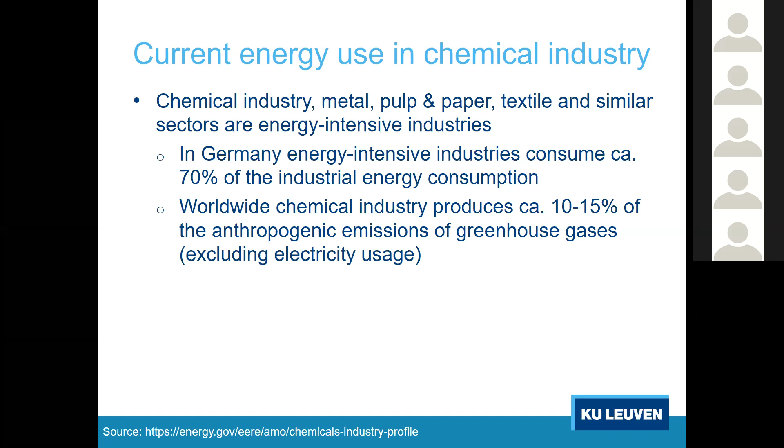Worldwide, if you exclude electricity usage, chemical industry produces 10 to 15% of the emissions of greenhouse gases produced by mankind. And obviously, there is already quite some electricity usage in chemical industry, so that number even increases if you would count that along. And again, we've seen numbers on how the energy market changes and the energy uses change, but still predominantly fossil fuels are the energy source for energy and electricity in particular to be produced.

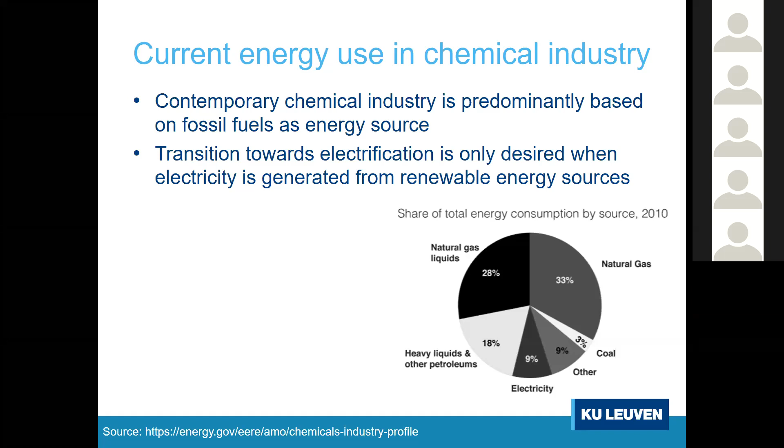And when we're talking about a transition towards electrification, I think it's important to stress that this is of course only desired when the electricity that is going to be used is generated from renewable energy sources. And still this is something that is currently maybe not lagging behind, but this is an issue, and it's already been mentioned by Sophie and Ludo as well, that this is crucial, obviously, that we need to have the sufficient supply of renewable energy sources to move towards this electrification.

Now, one of the issues or aspects of renewable energy is, of course, its variability. Variability over years, over seasons, over days, over hours, which we know by now, a lot of studies have been done on this, and it's clear that at this moment we have more or less a predictable renewable energy market. So we are able to know when renewable energy is being used, and when renewable energy is not being used, and when it's at that moment pretty cheap to use.

At the same time, a lot of research is being done on the storage aspect, batteries and so forth, but it's clear that direct consumption, if we can apply that, is, I would say, beneficial towards the use of renewable energy. One aspect that has not been mentioned yet, I think, is, and Ludo, for example, in the morning indicated that, of course, it's crucial that we have this renewable energy available.

I do think, and I want to give an example later on as well, I do think that we can use this renewable energy also, or we can apply electrification in chemical industry or in industry as a way to shave electricity production, where we have the flexibility to use fossil fuel-based electricity, but also, when the price is cheap, to use renewable energy based electricity. But I will come back to that in an example later on.

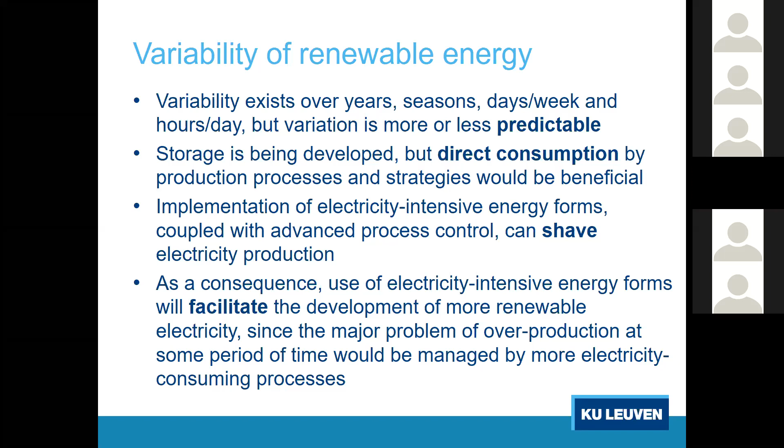And in my opinion, and as a consequence, the direct use of renewable energy in industry, in chemical industry, as a way to shave electricity production will, in that sense, facilitate the development of more renewable energy, as it will allow to increase the portfolio of renewable energy to be used.

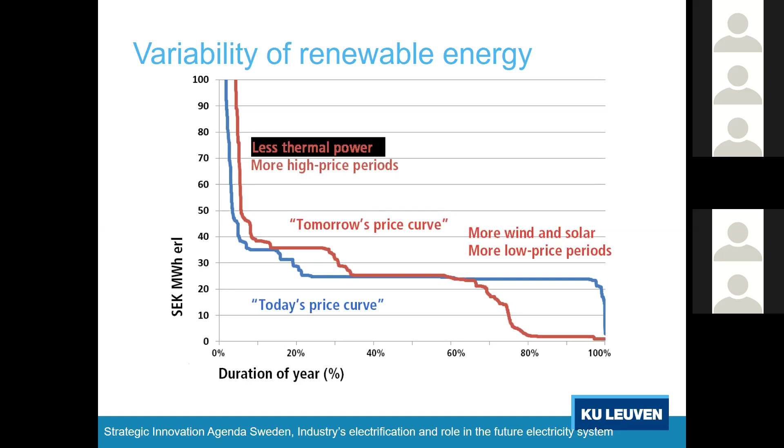What I would like to focus on in this presentation is the electricity-based processing methods, because I think that will be the majority of the electricity to be used in a chemical plant if we go to electrification.

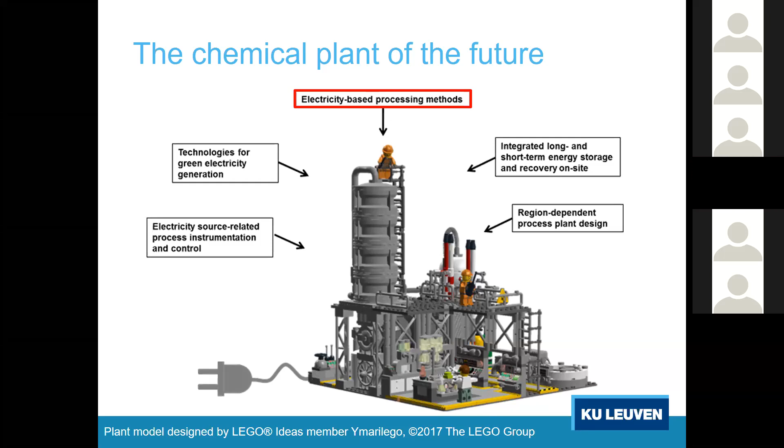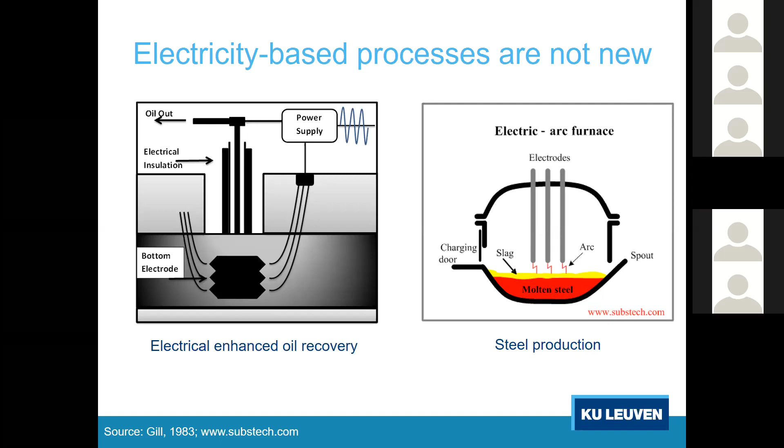We need to be aware that electricity-based processes are not new. In several sectors, and I just give two here, electricity has been used for many decades in chemical processes. For example, oil recovery processes, but also steel production, where the electric arc furnace technology is using electrical arcs, electrodes, to produce arcs and to melt the steel.

And we've seen, I think it was in the presentation of Sophie Wilmet, that there's different ways to use electricity, different definitions as well, direct use, indirect use. You could, I think, equalize indirect use of electricity with power to heat, where you're using electricity to generate or upgrade heat, whereas the direct use of electricity is then what we consider to be power to gas or power to chemicals, where we immediately use the electricity to activate chemical reactions. And electrolysis, electrochemistry, is one of the leading technologies there in the power to gas, power to chemicals transition.

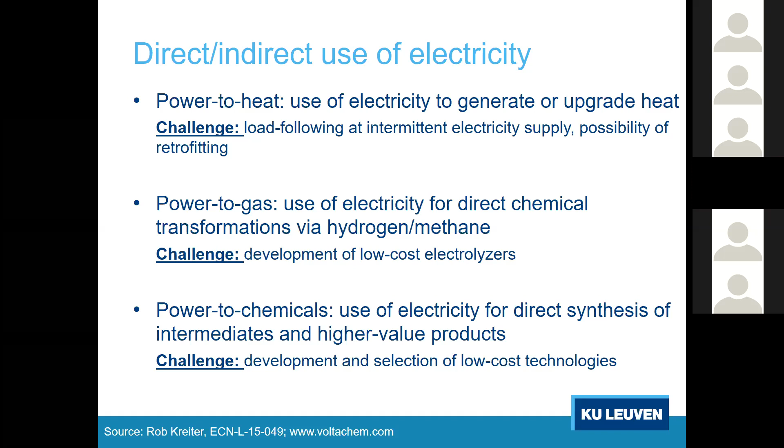What we do see is that the power to chemicals route is kind of slower in the uptake, or is still in the research phase, in the design phase, and so my expectation is that we will see many more examples from that perspective within the next years or decades, and eventually it will be taken up in the chemical industry as well.

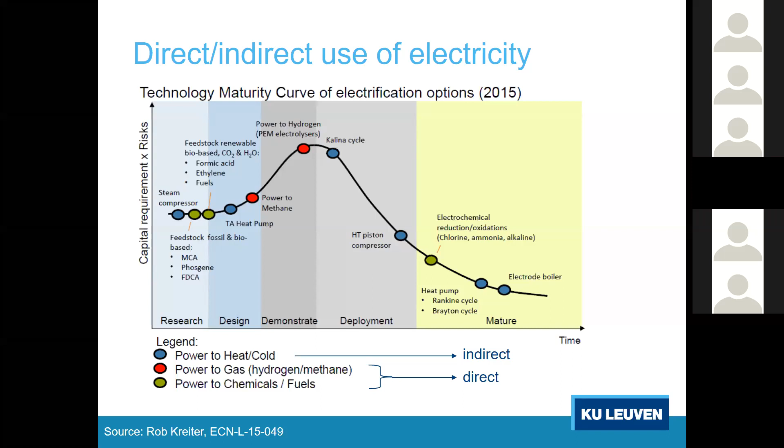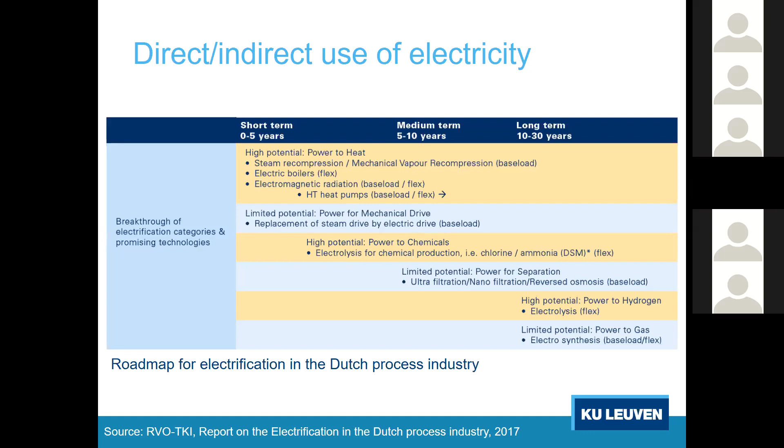Again, here another way to show this. This is coming from a report from the Dutch process industry, how they see the electrification. And what you see there again is mostly this indirect use, electricity for heating, some direct uses, but most of them are related to electrochemical processes, electrolysis, electrosynthesis, and so forth.

Now, how does process intensification come into the picture? Well, this is a scheme that some of you might have seen before, where we define or outline what process intensification is. There's different principles, different approaches, and this can be done at different scales. What I want to focus on is the approach of energy, because in my opinion, this is where there is clearly the overlap with the electrification of the chemical plant.

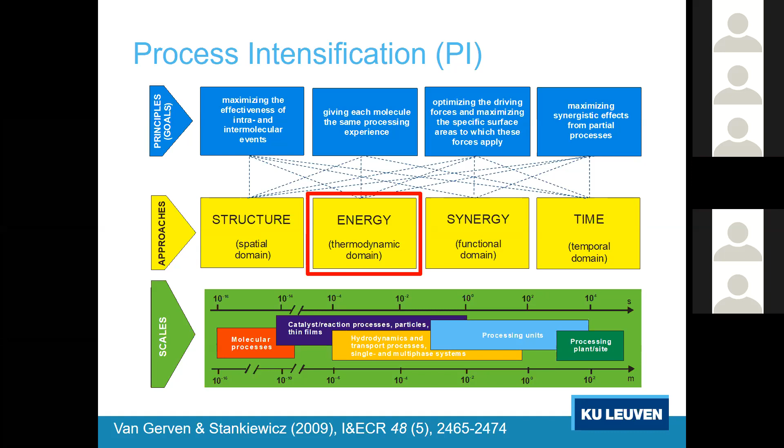There's also more indirect effects in the sense that it's not activating the chemical reaction itself, but electrical fields, laser fields, magnetic fields are known to, for example, control the orientation of molecules. And by this orientation of molecules, they can have an effect on the effectivity of the collisions between reactants and therefore make the chemical reaction more effective, more efficient.

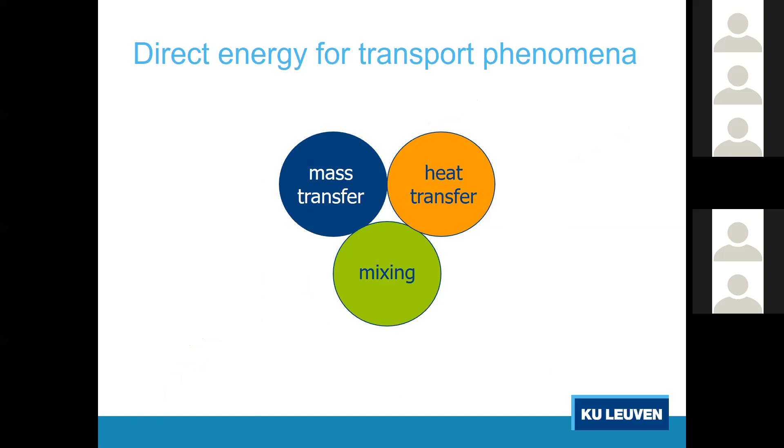And this is also shown with this slide where, from a general perspective, there's many studies, many examples where people have shown that different energy fields, magnetic, electrical, acoustical, flow, centrifugal fields, and so forth, allow to improve transport phenomena, mass transfer, heat transfer, momentum transfer, which again is not acting upon the chemical reaction itself, but it's acting upon the transport phenomena, the kinetics of the reactions.

And so this is certainly something not to be forgotten, and this is also a way to look at the electrification of the chemical industry. So again, this would be, in my opinion, a power to enable the process, not necessarily the chemical reaction itself.

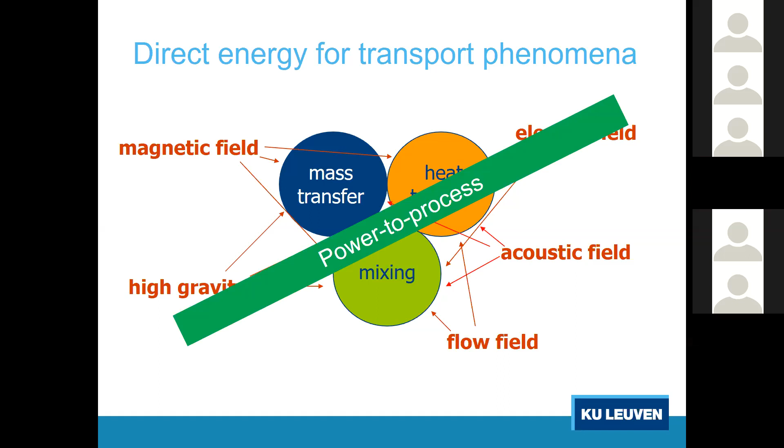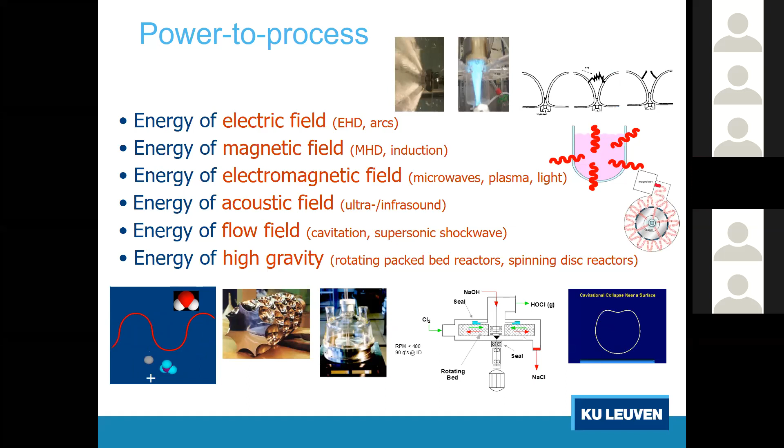And so in process intensification, we're looking at different energy fields. Again, I've mentioned them already quite some times now: electrical fields, magnetic fields, microwaves and light as the electromagnetic fields, sound fields, flow fields, centrifugal fields. And all of these energy fields are actually supplied by electricity or activated by electricity. So if we're trying to find ways to use these energy fields, we're actually working in the field of electrification.

Just as an example of this electrification by centrifugal fields, something that has been taken up already quite some time in industry is rotating packed beds. Another example is spinning disk reactors, but this example is rotating packed beds for the hypochlorite synthesis, where basically we're using a rotating system where the bed is rotating. You see that there's two, let me take my pointer here, there's two positions where the reactants are injected. This is the chlorine being injected from the side, the sodium hydroxide being injected from the shaft of the rotor.

And the two reactants are basically mixing very intensively at the location where they meet in the centrifugal field. Which allows you to have a very intimate contact, very fast reaction, but also at the same time immediately separate out the two reaction products, which is the hypochlorite on the one hand and the sodium chloride on the other hand. And this is beneficial because otherwise, if you keep those two reaction products together, you will have side reactions which will deteriorate your product.

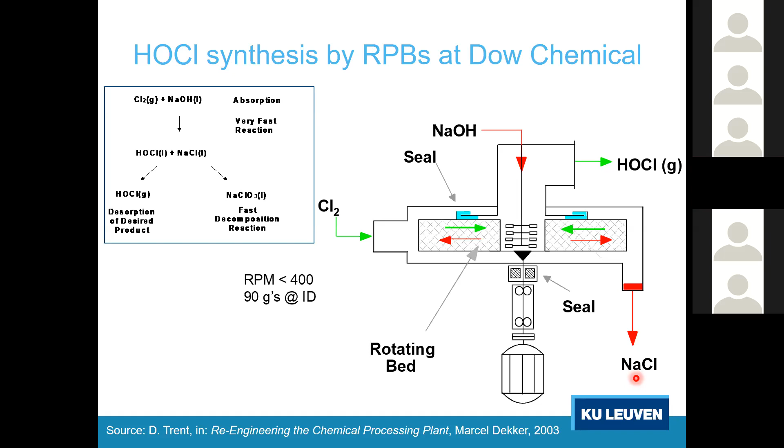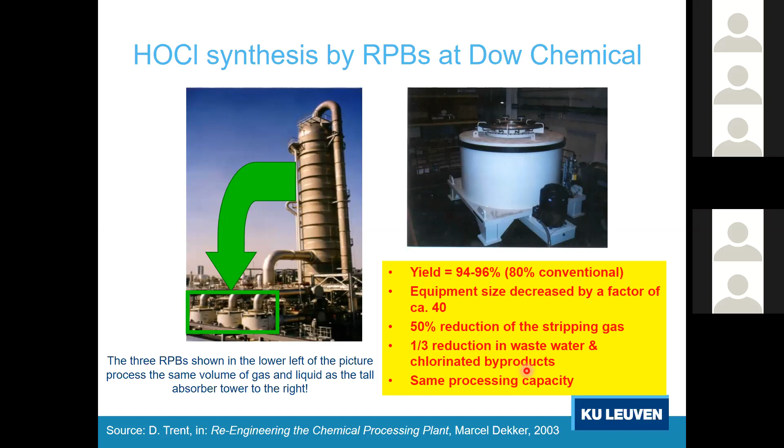Just to show that this has been taken up in industry, the left-hand picture shows the old process, which was a big scrubber, which has been replaced by 3 of these rotating packed bed systems. And for example, the yield has increased from 80% to about 95%, with lots of other benefits, equipment size, reduction of stripping gas, reduction of byproducts, and so forth, for the same processing capacity. So that's important to stress. It's a fair comparison on that level. This was an example really already taken up in industry.

And this brings me back to the previous point that I wanted to make on the additionality of the electricity-based energy. Industry would be able to use electricity at the moment that the prices are cheap to temporarily use, for example, microwaves to produce another grade of this polymer, right? A grade with a higher molecular weight. And this company can do that as long as the price is cheap. And so this means that you're building a kind of flexibility between conventional heating and this electricity-based microwave heating, which allows you to diversify your portfolio of products and at the same time produce at a cheaper price.

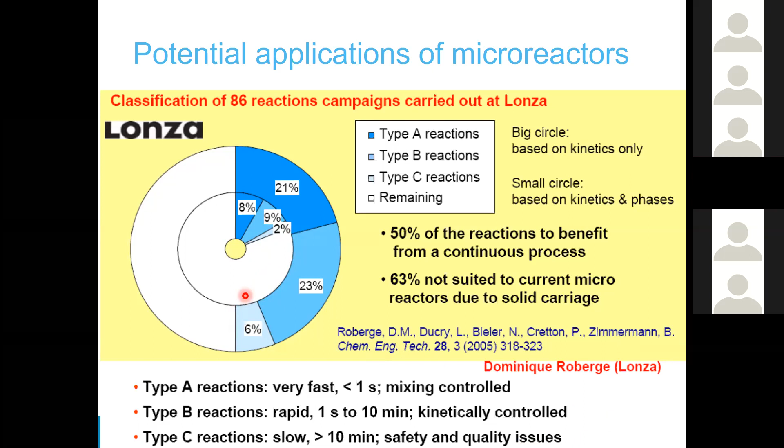Obviously, in microreactors, one of the big problems is working with solid materials, solid catalysts, or crystals that are being formed. I guess many of you know the report of Lonza 15 years ago, where they evaluated what microreactors or continuous flow reactors could do for them in their processes. About half of their processes would benefit theoretically from a continuous process, but more than half of this half, 63% of those reactions that could benefit theoretically, had solids in the process, which is then presenting a problem for these microreactors.

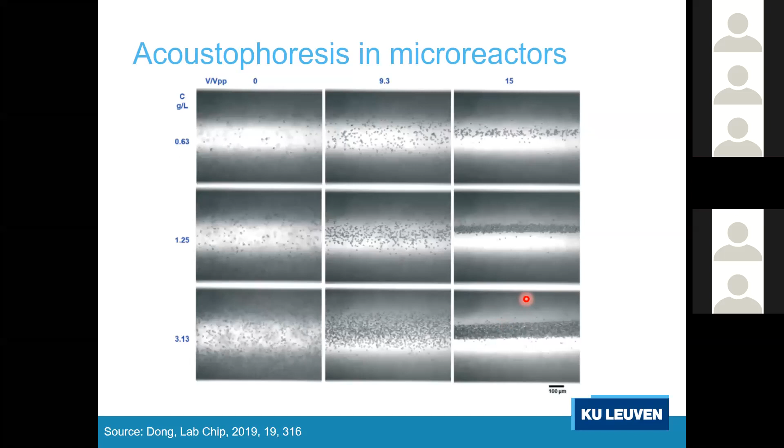The fact that these electricity-based energy forms can help in transport phenomena, mass transfer, heat transfer, mixing, and therefore can help the transition to, on the one hand, renewable energy sources by having an additional flexibility in the use of renewable energy, and also help in realizing the transition to continuous processes.